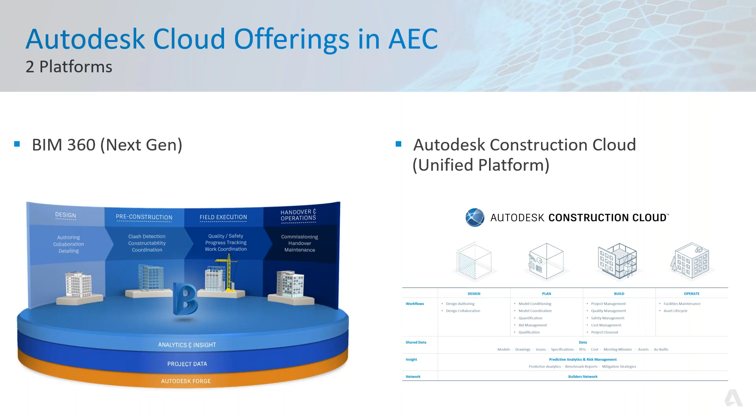Now that being said, there are currently two platforms for cloud solutions. There's what you may have already used or experienced as BIM 360, also known as Next Gen. And now there's the new Autodesk Construction Cloud, sometimes referred to as the Unified Platform. It's called Unified Platform because it's taking that BIM 360 platform and elevating it.

So keeping all of that data within the same platform, from pre-design through pre-con, construction, all the way through operation. Currently with the BIM 360 side, the construction and build portion is rather separate. With the acquisition of PlanGrid, that has now been rolled into the Autodesk Construction Cloud, making it a one-stop shop for all your files, information, issues, RFIs, and tracking within a single unified platform.

So BIM Collaborate Pro, right? Anytime, anywhere, AEC collaboration. This is where I want to start to get into some of those differences and how they translate from BIM 360 design and BIM 360 coordinate through, how that translates to Collaborate Pro.

So BIM Collaborate Pro, you can kind of think of it as the current BIM 360 design. So you've got your design collaboration, your work sharing, document management, project insights, all of that information from that module, plus BIM 360 coordinate. So you've got your collaboration and your model coordination, and it's all built on the Autodesk Construction Cloud.

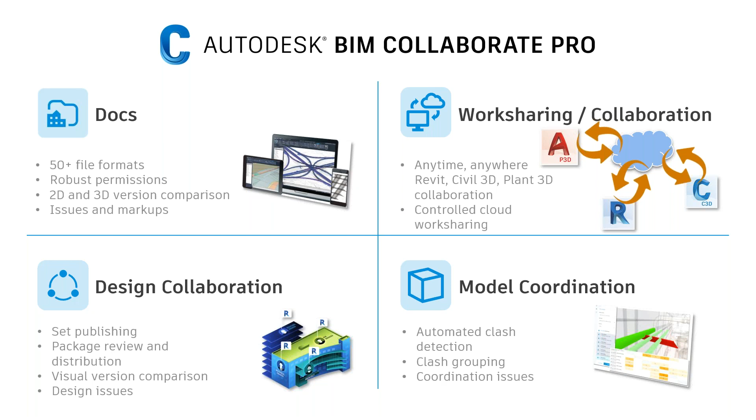Again, another way of looking at this information. I remember when we first rolled this out, there was a lot of confusion, a lot of questions, like what exactly is all this stuff? So like I just said, BIM Collaborate is Docs, design collaboration, model coordination. BIM Collaborate Pro is your work sharing and your design file collaboration. Hopefully that clears up some of the questions some of you may have in terms of what exactly BIM Collaborate Pro is, and how that relates to the BIM 360 Next Gen platform.

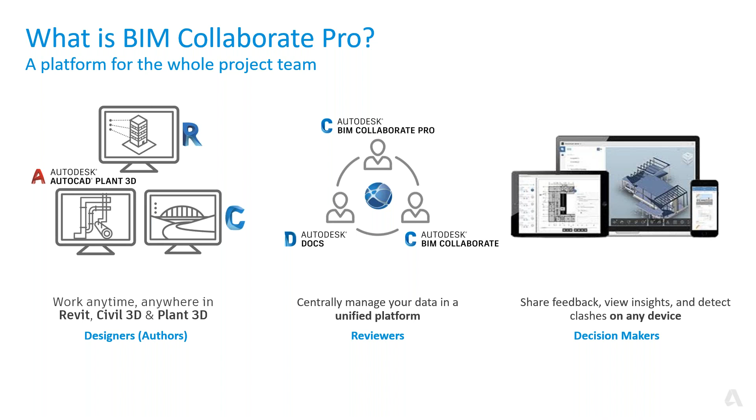So I'm going to start just kind of blowing through some of these slides because, like I said, I really want to get into the product and show you all live exactly what all this is. So we've talked about some of this stuff already, the collaboration of Civil 3D, Plant 3D, all in that unified platform, creating markups, comments, reviewing your file or project insights, clash detection, model coordination.

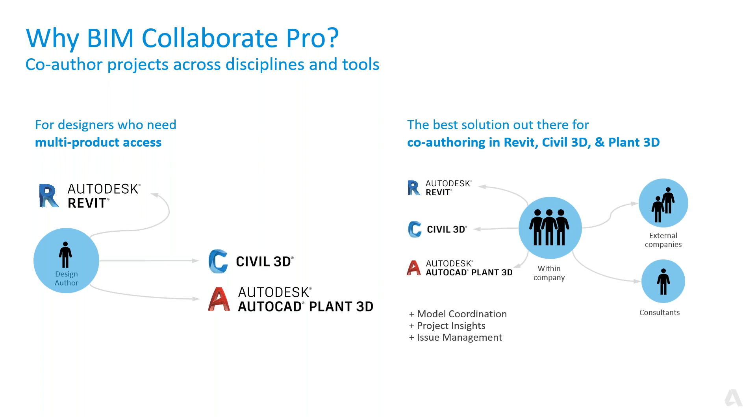But why, right? So this is for designers who need that multi-product access, being able to co-author all these files and do that collaboration, that project coordination.

Again, so this is where we're just going to blow through the last couple slides here, just repeating some of the stuff we've already seen: Revit Worksharing, Civil 3D, Plant 3D. The big thing here is the automatic file locking. With versions prior to AutoCAD 22, you had to install a separate add-in for file locking. That is now automatic with AutoCAD 22 vanilla and verticals as well.

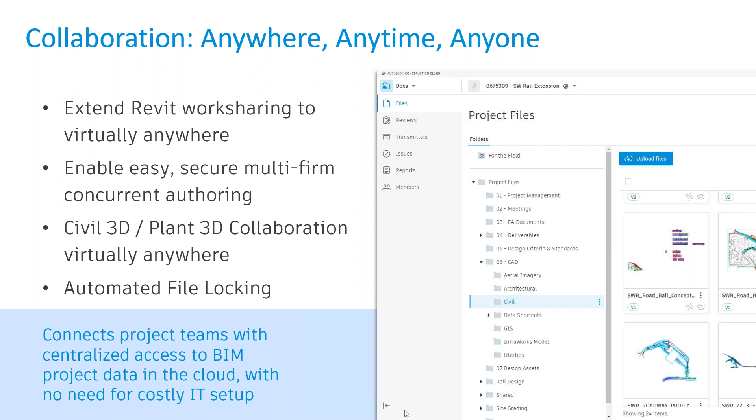And being able to assign permission, so based on role, company, username, giving people access to the folders and files that they need to see, and really nothing else. So limiting project access to the people that really just need those files. Take a look at collaboration, how we can share our files with other team members, other collaborators on our projects, and how we can track those as well.

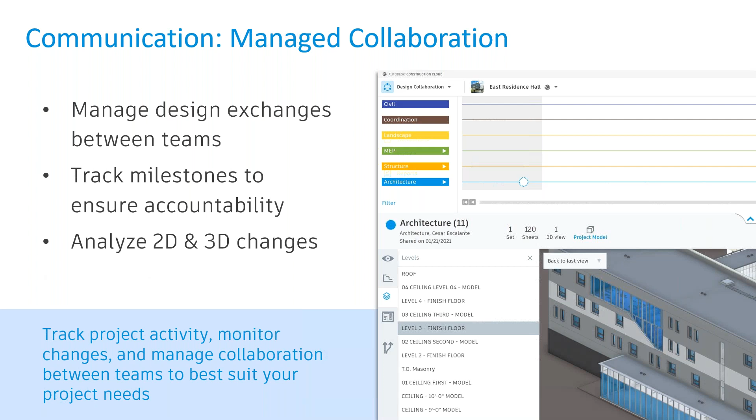Tracking issues, adding comments, markups, sending transmittals. I'm going to dig into all of this in just a moment here, and really give you an understanding of what is capable with the Autodesk Construction Cloud.

Clash detection, personally this is one of my favorites because it's automatic. Simply upload your files or copy your files to a specified folder, and the power of the cloud does all the hard work for you. Basically just sit back and wait for it to finish, and you get a nice little heat map of where the majority of the clashes are, and you can start to filter through and assign clashes as issues to the responsible parties.

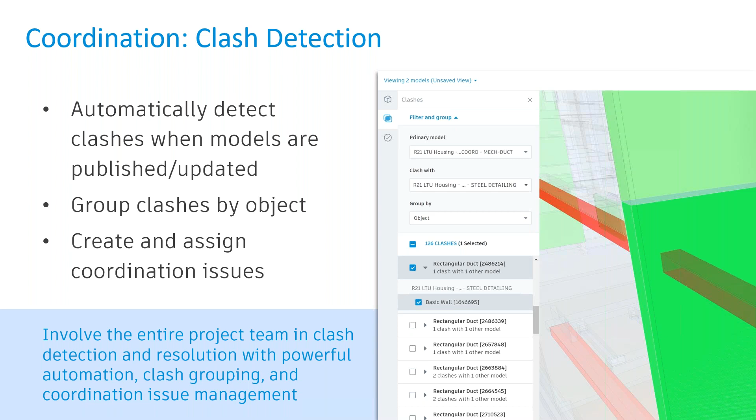And with that, let's just jump right into the demo here.

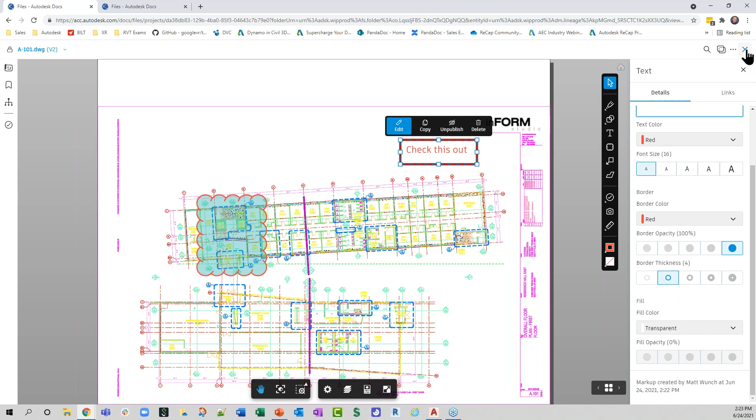Likewise, if I were to publish this, and then jump back out, do a refresh, we'll see that sort of crown icon now shows as solid black, indicating that there is now a published markup. In this case, there's just the one published and one personal markup.

The other thing I want to point out is, move the mouse here, and you see all these files have some sort of V and a number next to them. This A101, for example, there are two versions of this file right now. The great thing about the cloud is that you only see the latest and greatest version, right? I remember I mentioned there's unlimited storage. If we click on this V, we can actually see there is version 1 as well. So that file is still technically there, just sort of hidden in the background.

We have the ability to make that current if, for whatever reason, we need to go back and say, hey, this design from earlier, let's go back to that. So we can do that. You can also download it. You can also copy the file, so maybe you want to put it in like a temporary holding area for the time being. You can certainly do that as well.

Now, one of my favorite features is compare versions. When I was a CAD manager, I'd often get files from outside engineers or consultants, and they'd say, here's our updated file, and that's pretty much all they would say. They wouldn't say, we've changed this, this, this, and this. It was up to us to do the old XREF trick, where we take the new version and the old version, make one, say, gray, and then the other one maybe like red or green, and then do the send to back, send to front trick to see what has been changed. With the Construction Cloud, that's all done for you.

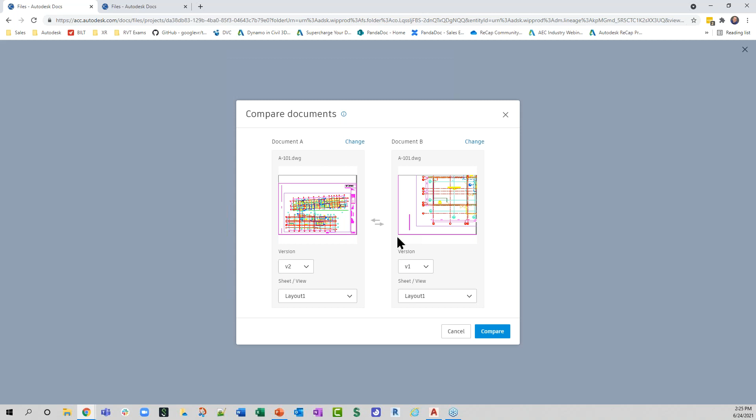If I were to just click on compare, it gives me a little preview of my files. Any layouts in there, I can select those. In this case, there's just the one. I'm going to click compare, and essentially it's going to do that overlay trick.

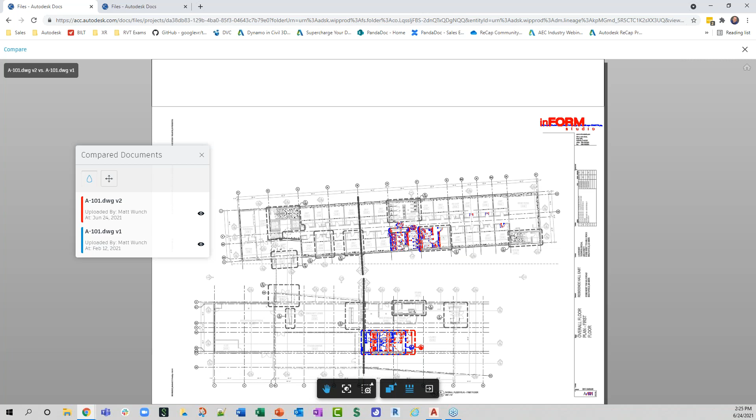So version 2 is red, version 1 is blue. We can toggle them off to see them individually, or toggle them both on. It's a great way to see what has been changed and where. Most of the time you're just going to get a file that says, hey, we made some changes, and that's it. It's up to you to figure out where that utility closet is now, or where that manhole on the site moved to. It's a great way to quickly get an idea of what has changed.

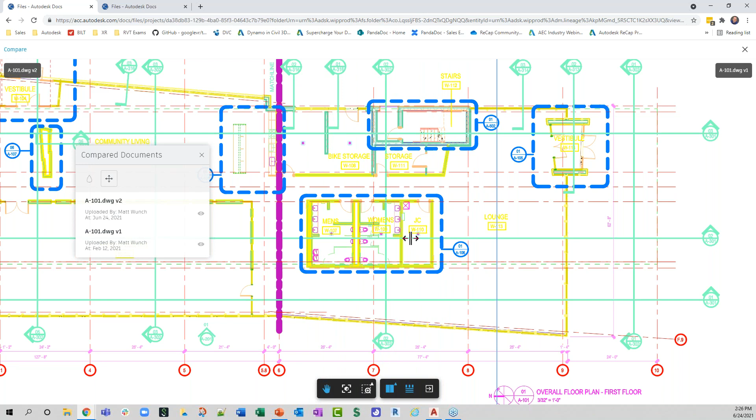You can also do a side-by-side slider comparison. You see we've got this bar in the middle here. Now if we slide this, it's just another way of looking at the information. Actually down here it's a bit more apparent. So this area right here, as we slide this across, it's an easy way of seeing what has been changed.

And again, all these versions, whether it's DWGs, DGNs, Revit files, PDFs, all those different versions are stored in the cloud, sort of in the background. They're still there, you have access to them. It's just that you're only seeing the latest and greatest version.

Like I said before, the construction cloud is design file aware. So I've got a DGN file open, and I don't need MicroStation installed. I can view pretty much any file format. There's upwards of 50 plus different file formats that we can view. Design files, Microsoft Word, Excel, PDFs, all these different file formats are easily visible and editable in the cloud.

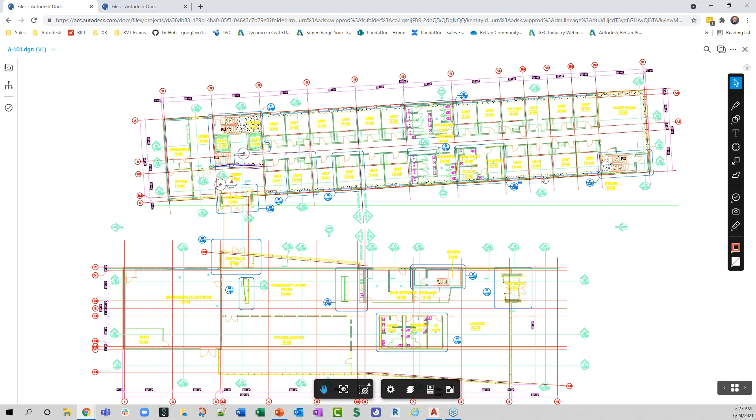Jumping back to my A101 file, we know that this area down here shifted, right? Because we saw that in the comparison. Now, what if I wanted to assign this change, or assign someone to take a look at this and say, take a look at this, what's going on here?

You can certainly create what's called an issue. And right off the bat, we have Matt's bad design. I do this one all the time just to demonstrate that this list of issues and categories is totally customizable. So if you have certain wording or phrases that you prefer to use, that can totally be done. But let's just go ahead with Matt's bad design, and we'll tag this area right here.

Once this spins up, we'll see a list of fields that we can fill out. Let's see, my internet's been chugging a little bit here. Let me close some extra windows to try to free up some bandwidth.

There we go. All right, so we can see the status is currently open. There's my category, my bad design. I can give it a description, and I can assign it to somebody. So I'm going to assign this to Art Vandalay, and he's automatically going to get an email saying, hey, there's something for you to take a look at, and it's going to have all this information in here.

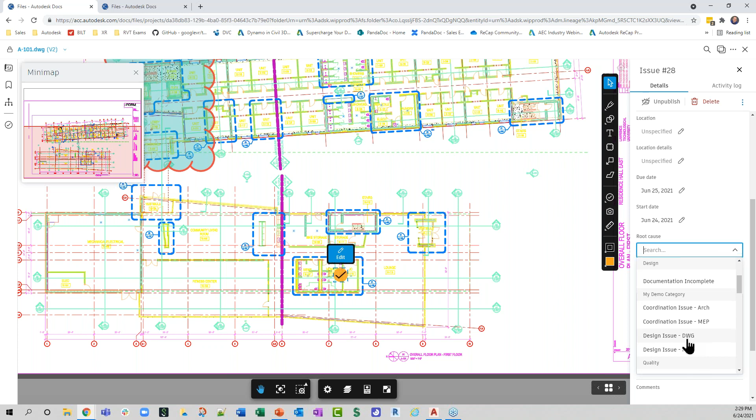Let's say I want Art to have this done by tomorrow, and we're starting today. Root cause, again, this list can also be modified as well, so maybe we'll say documentation incomplete. We can add custom fields in here as well. We can also attach photos, files, RFIs, and other assets to give them a more complete view of the issue, if there's any supporting document that needs to be added.

All right, so Art has already received an email. He's got a link to this file, this particular issue, and it brings him right to this location. The great thing with everything that goes on in the construction cloud is that it's tracked. There's a constant audit trail of who's done what and when. So if you take a look at this activity log, for example, we can see that I've created this issue for this particular area, and who I assigned it to.

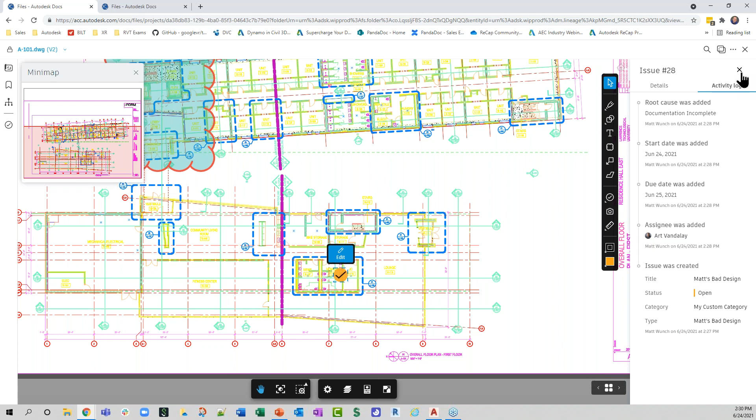Then as Art goes through and makes his changes and changes the status to closed, all of that information will be reflected in that activity log. And again, that's not just for issues, that's also for all the files themselves.

So if we take a look at everything that I've been messing around with on this file today, we'll see a nice list of activities here. You can see who's viewed a file, who has downloaded it, who's locked the file, all these different audit trail type items. It can be exported to a file, I believe a CSV file, so being able to share that information as well if needed.

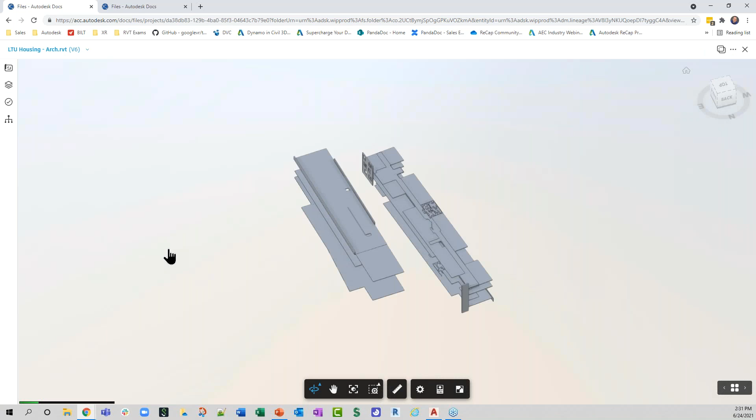And like I said before, it is design file aware. So we've been taking a look at AutoCAD files, Revit files as well. Same kind of thing. So whatever's been published in that file, whatever views you've decided to publish, to save out, those views are available. You can take a look at it by different levels.

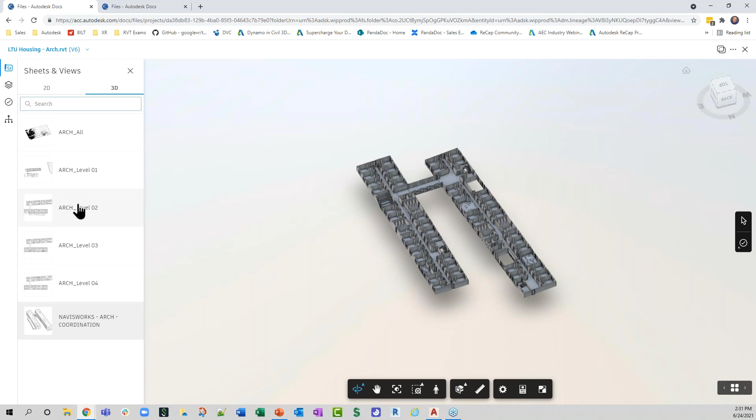We have that same issue tool as well. If we flip over to a plan view... no, I wanted 2D plans. We'll go with, I would say, 103 overall.

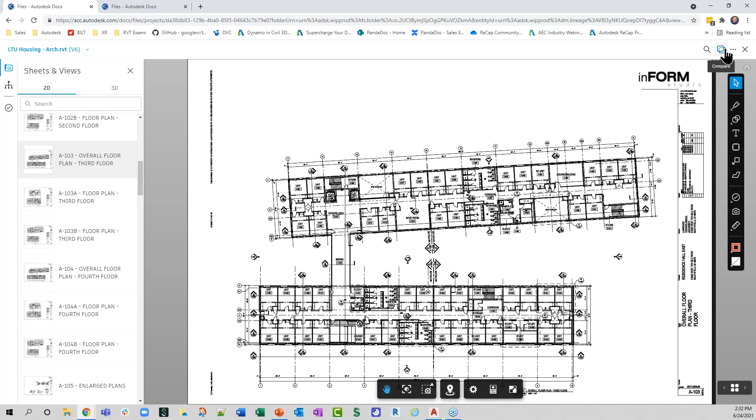In the plan views, we have the markup tools that we saw earlier in the AutoCAD files, as well as the issue tracking. We could do the comparison if there's multiple versions. Again, it's design file aware, so it knows how to read these files. It knows how to view them.

And the great thing about this is that if we drill into this plan view, we click on a wall - well, it's not just a couple lines and some hatch. It's an actual wall, because it's digging into that Revit model, so we can see exactly, kind of query the model in this sheet view and get more information out of it.

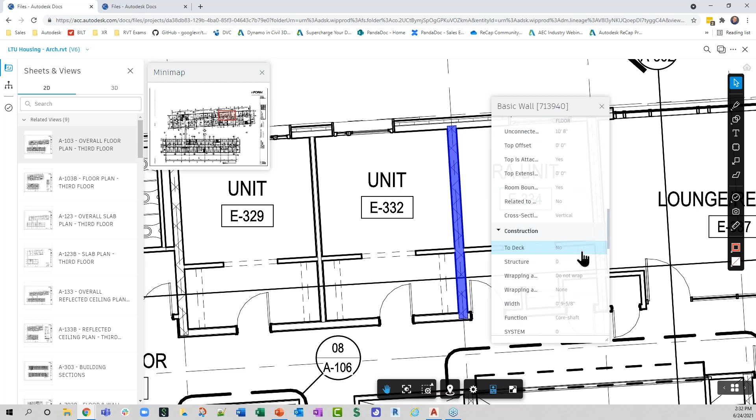All right, so let's jump over to design collaboration. So one of the new additions to design collaboration is the ability to add DWG files. So your Civil 3D, your Plant 3D, even your vanilla AutoCAD users can now join in with the process here of creating sort of a package of files to be shared out with other team members.

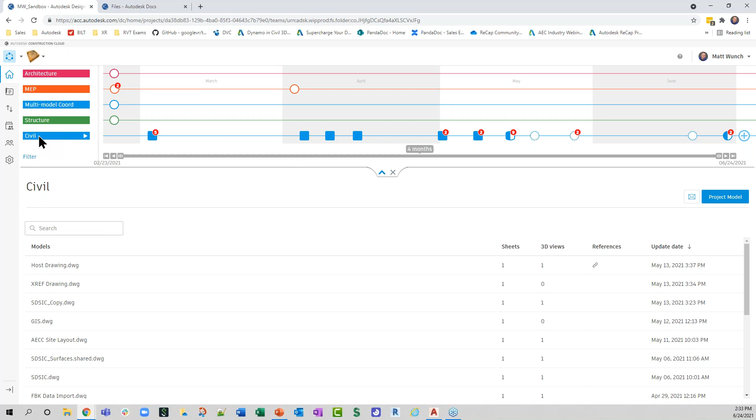So let's take a look at this from, let's say I'm the civil engineer on this job. So I want to create a package that I can share out with other team members. I can select which models I want to share. And you notice some of these have a little link icon next to them. So that indicates that some of these have an XREF. If I click on that link, I can choose to include that XREF in my package.

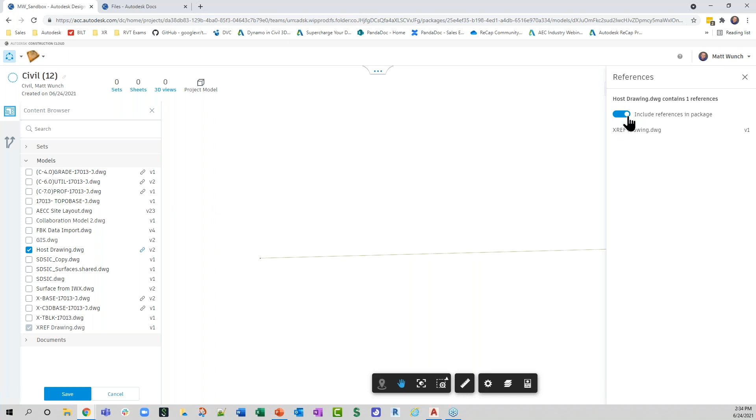And when I do that, the XREF file is sort of grayed out because this inclusion here is being controlled by this toggle over here. So just something to be aware of if you're trying to uncheck something and it's not working - just make sure you've got the toggle on or off here, depending on what you want to do.

But this is a great addition, because now AutoCAD users can join in being able to share out files. So I'm just going to grab a couple of others here just for... So we got 5 different files here that we're going to save out. So let's say this is maybe our 50% DD package or something.

So it's basically kind of bundling up these drawings. Almost think of it like a zip file in a sense.

So then let's say now I'm the architect, and I want to take a look at the civil files that have been shared out. So I've got a little icon here that shows a half-full circle. If I click on that, it kind of gives me this expanded view. So it shows me that one of these packages has been consumed, the other has not, and this is the one that I just created, right?

So you can see that 50% DD. So when I click on this, I can now see which files the civil engineer has shared with me. And I mentioned consume just a moment ago. So there's three different ways of linking Revit files, AutoCAD files within your cloud project.

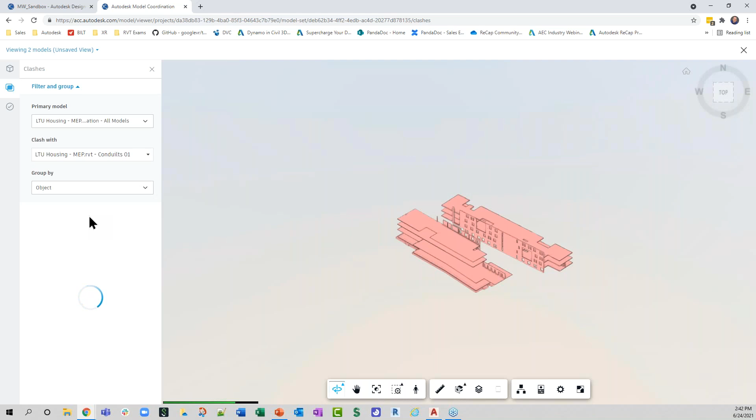So on the left we have two models that we're clashing against, our primary and our secondary model. We can view this a couple different ways. We can look at the objects themselves, the individual objects. If your model is well laid out and modeled with actual system names for everything, you can see the individual systems. In this case, we've got 302 associated with no system, which makes it a little more difficult to clash using the system name.

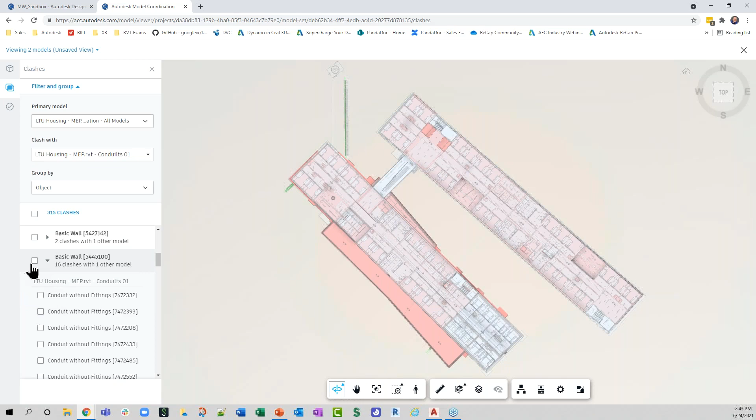You also have type names, so taking a look at the individual family types within the models. Just going to jump back to object here and scroll down a ways. This looks like a good one - 16 clashes. So we've got a basic wall, and a whole bunch of conduits running through that. Let's take a look.

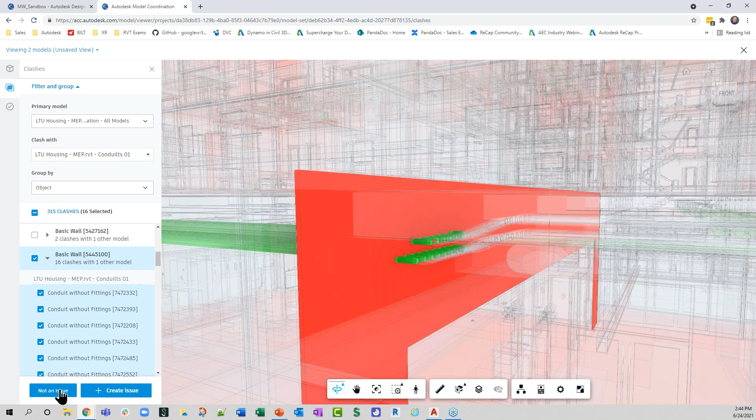So like I said, these are physical hits within your model. At this point I can either create an issue like we saw earlier and assign it to somebody, say hey, take a look at this. But most likely it's probably not an issue, right? They just didn't model any kind of penetrations. So I can simply say not an issue and clear that out. So let's say it's a valid penetration, and we'll say okay - now that's been cleared out of our list.

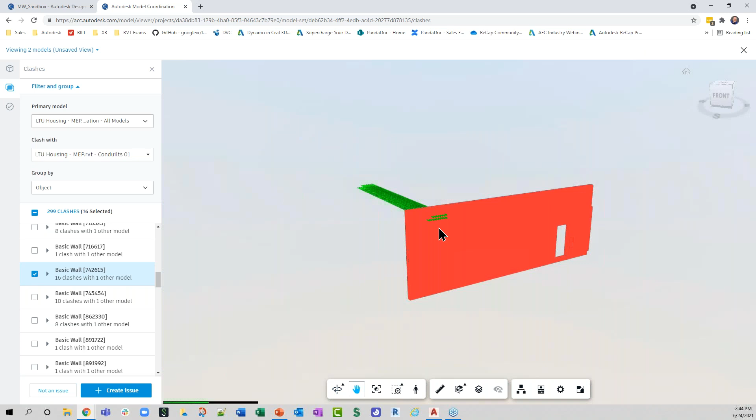We can take a look at this other one here, and this looks like a similar situation. We could clear that one out as well, or we could create an issue just like we saw before. It's spinning up the dialog, and once it spins up we'll see that same interface, all the same fields - who we can assign it to, the due date, any comments, any supporting documents, photos, RFIs, assets, what have you. That can all be included in that as well.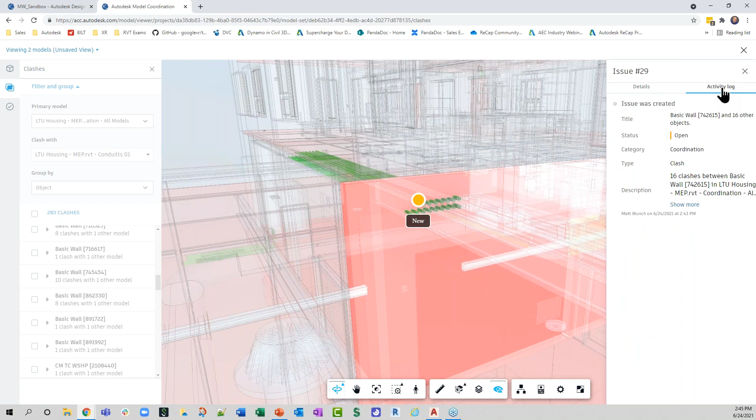And again, we've got that same activity log, that same history tracking of who it's been assigned to, and whether or not they've actually closed it out.

How are we doing on time, Alan? We going? Was it an hour? We've got about 15 minutes left, so you're still good to go. All right, let's grab a quick sip of water here.

So that's a lot of the basic stuff of BIM Collaborate, BIM Collaborate Pro. I do want to show you a little bit on Build, kind of jumping the fence, if you will, to the construction side. I mentioned earlier this is that unified platform that holds all the data from pre-design all the way up to construction and operation, beyond. So if we take a look at Build, it's starting to get into RFIs and assets and things of that nature.

One of the really great things is that those issues I created earlier, that issue for Art Vandelay to take a look at that particular file - if I click on this link, it's going to bring me right to that drawing, right where that issue is. This is a similar kind of interaction you'd get in an email. If someone assigns something to you, you'll get that email with that link. You just click on it, and it's going to bring you right to this, so you can start to really drill down into that issue.

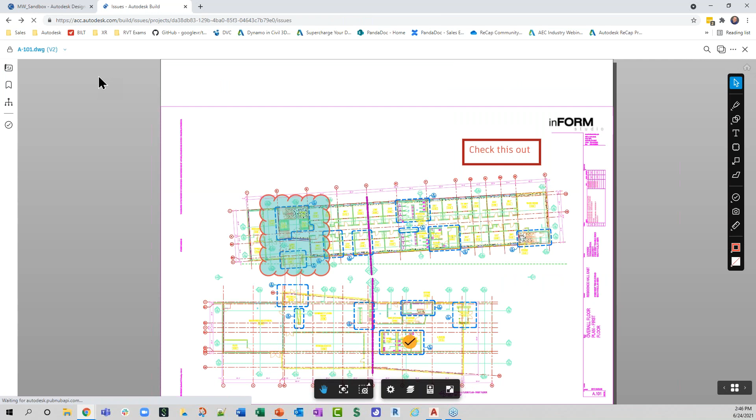But the point is that this information just seamlessly flows from the design side, the docs, the design collaboration, the model coordination, right over into the construction side of things. So from here you can start to create RFIs if necessary from your issues. It's totally within the realm of the unified platform.

I am kind of getting a little bit out of my wheelhouse, I will admit - this is more the construction side. You may have heard the term ACC, the Autodesk Construction Cloud. So this is more in their wheelhouse, and that's where they would take over. But I just really wanted to illustrate that this data seamlessly flows from one side to the other.

Unlike the previous BIM 360 next gen version, where things kind of started to break up in terms of getting information over to PlanGrid for that post-design, pre-construction type of stuff - with the new construction cloud, PlanGrid is essentially integrated with this. So a lot of that information will flow right to the PlanGrid mobile app. You'll be able to see your files, see your issues out in the field, and react to them whether it's your iPhone, iPad, whatever your device is.

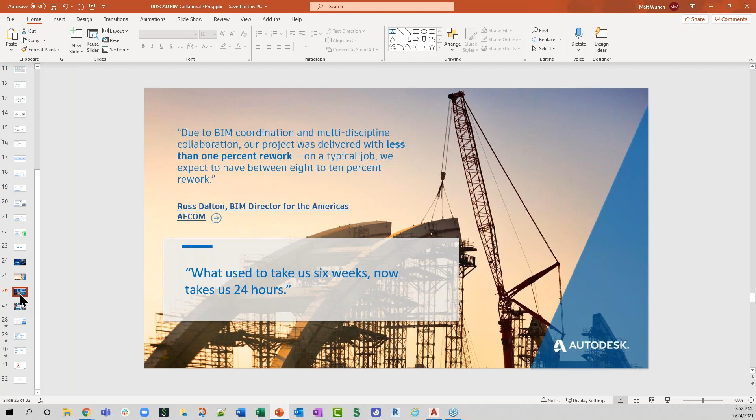Wouldn't be a customer facing demo if it weren't for some of the quotes that we have from customers. So a lot of customers are seeing huge productivity gains, whether it's 6 weeks down to 24 hours, or looking at horizontal construction, right? Keeping in mind that the DWG files, the Plant 3D, the Civil 3D, they now really have a seat at the table with the Revit folks, which was really lacking in the past, especially when it comes to being able to package up those DWGs and share them out. Really just bringing everything together now for that overall holistic view of your project site.

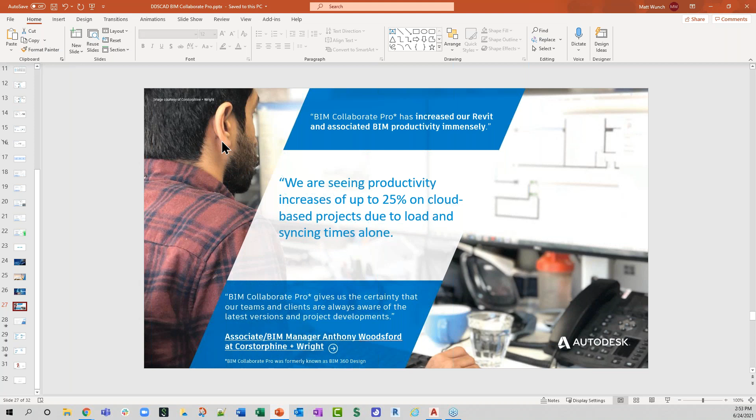All right, seeing productivity increases of up to 25% on cloud-based projects due to load and syncing times alone. So I didn't touch on this, but when it comes to Revit, for example, when you sync, you're just uploading those little bits of data that have changed. You're not syncing the entire model back and forth. So huge productivity gains there with regards to decreased sync times.

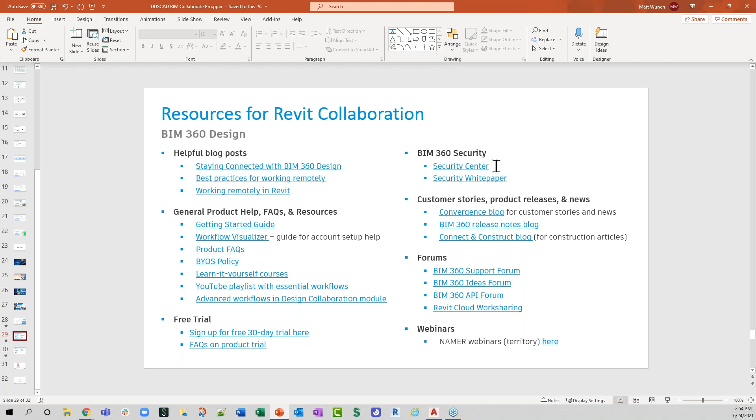Some resources for Revit collaboration: forums, blog posts, the BIM 360 security information. I've got a similar slide for Civil 3D and Plant 3D. I don't know if you guys mentioned it, I don't remember, but we should be able to share this out. I don't think there's anything in this slide deck that isn't customer facing. I may need to double check, make sure there's no hidden slides, but I should be able to share this out with the folks at DDS CAD, and if they can get it out to you guys, that'd be awesome. That way you do have access to all these hyperlinks here to see what's behind the scenes with some of this stuff.

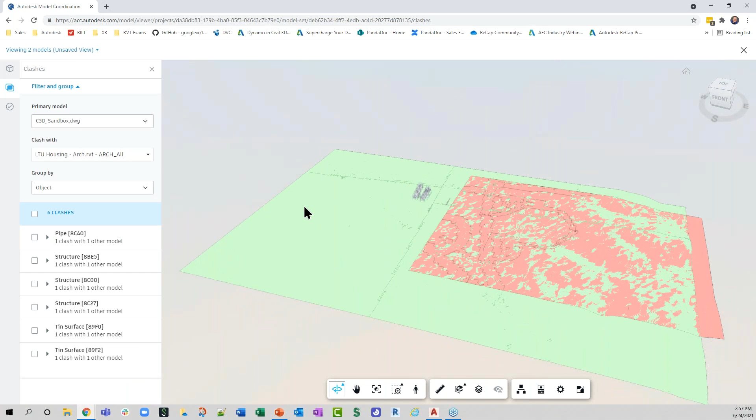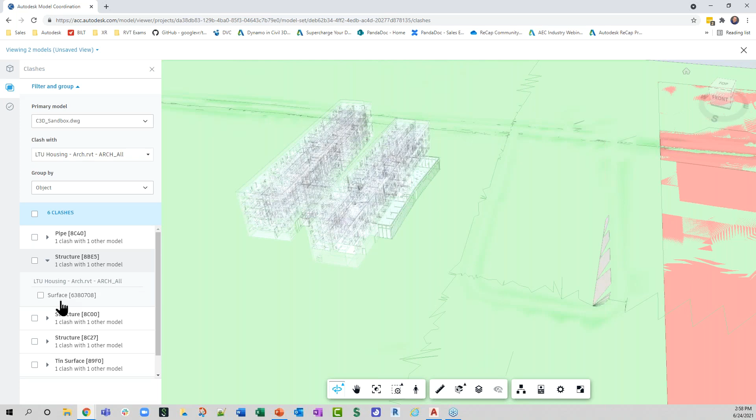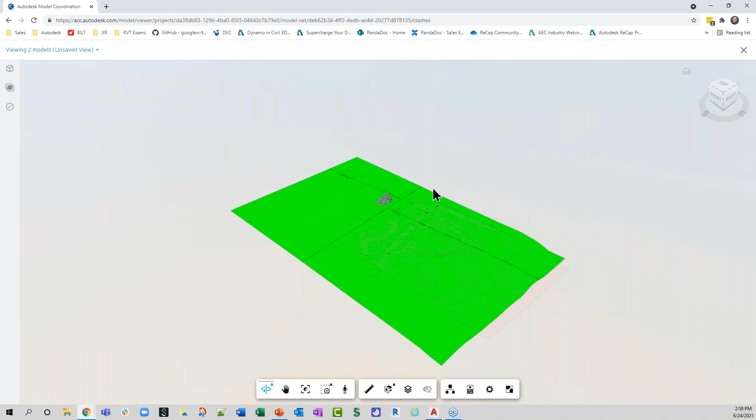So here's that clash that was spinning up before between the Civil 3D model and a Revit file. We can see we've got some structures in the Civil 3D file, as well as a surface that most likely is not a clash because the structure is going to hit the surface anyway. So that's one of those situations where you would just say no, it's not an issue - it's a valid penetration, valid clash, whatever - and just clear that right out of the list so it doesn't show up again. But yeah, Civil 3D, Plant 3D, Revit models, clash them all against each other. There are also a handful of IFC files. We'll get the AKN for that and post it along with the other links on the YouTube channel.

Okay, great, I had one other question come in, but I think you just answered it: does Revit support clash detection from IFC files imported from other software? But I think you just answered that one. Yeah, like I said, there are a few IFC file types, and if I recall correctly they had to be created from a specific product. I do remember Tekla being one of those products. I don't recall off the top of my head what the others were.